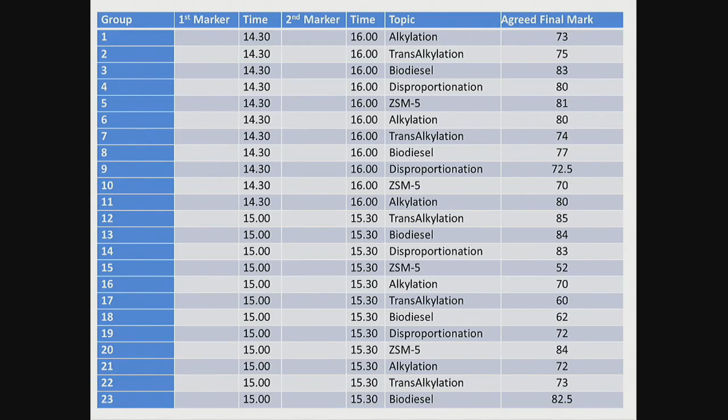All right everybody, let's get cracking. We've got to finish off the lecture, and then we've got an introduction to the next part. So we're on end of chapter 4, and away we go.

All I will say is congratulations, you beat last year's average mark for all parts of the coursework, just so you know. Well done to you lot. That's good, because last year they were good, but you were better. Maybe because some of you did the bio thing, I don't know. Maybe because the poster thing was relatively new for the bio and you had the opportunity, and it helped a little bit, I don't know, but you were better.

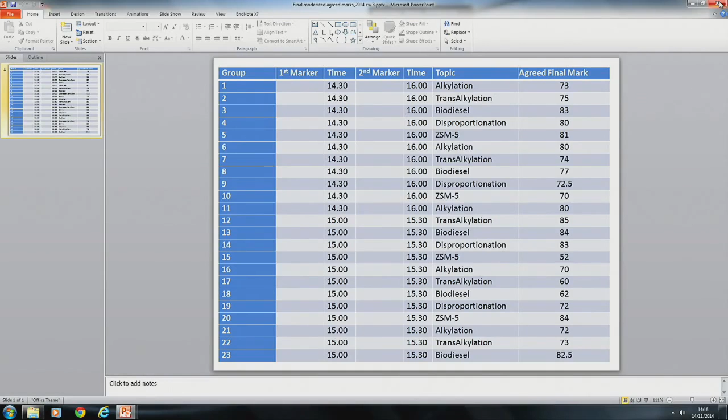The average on part 2 and part 3 was 5% better than last year. In fact, I was hoping to take some marks off you, but now I've actually given you extra marks, so good are you. Now then, I thought I'd opened these things up, but obviously I didn't.

Forgive me, just a little bit of fluffing around, apologies. Right.

So we talked about, and I'm flicking that up, to remind you what the ideal pore model was supposed to look like. It was a tube with a blocked end. An inkwell pore is what we refer to them as in the trade. That's your model.

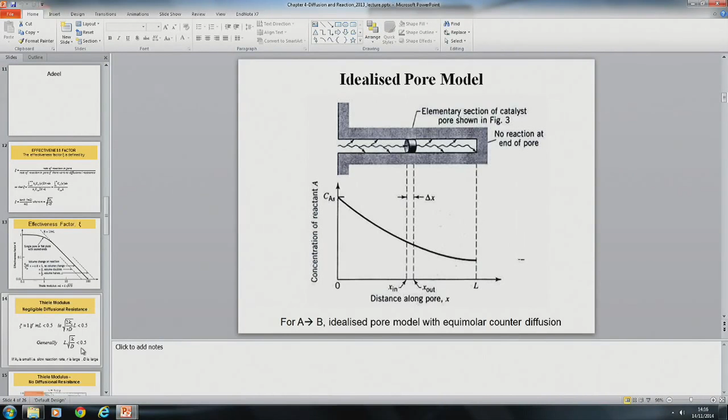What we did in class was we introduced the effectiveness, just so we know where we are. Effectiveness. And then finally we said, hold on a minute, pores aren't straight inkwells, they're actually ziggy-zaggy lines, and the effective diffusivity is actually different. That's where we stopped.

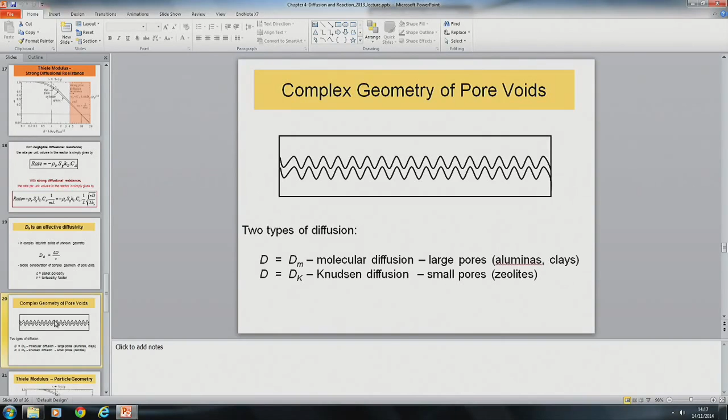Now in the notes, there's a little addition to what I seem to have not bothered putting on the slide, such a trivial thing. So the next slide goes on to explain what slab geometry is, which is that one.

I'm going to put that one up, but I'll allow you a minute to focus, because I know it's Friday afternoon. I want you to read the next bit of words underneath the ziggy-zaggy pore picture, just to introduce what we're about to quickly do 10 minutes on.

So now, ignoring the fact that it's a tortuous, variable shape, the length dimension can be taken as equal to A0. We're splitting the pore from the middle, so the pore in the middle is minus A that way and plus A that way. Then we take into account the surface area over the volume, and we've got an equation. That's the bit I want you to look at and take in.

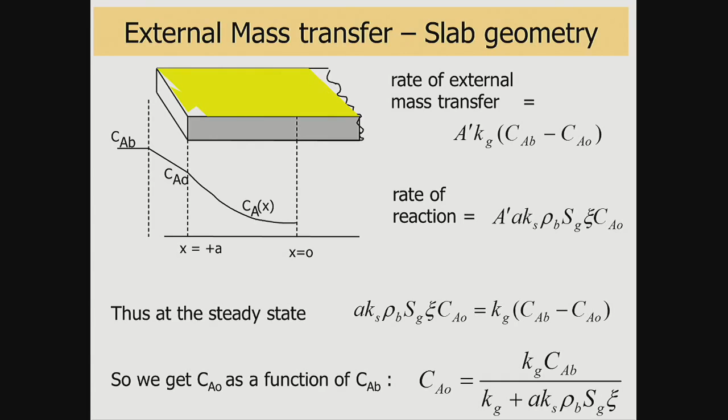That is pretty common in many of the textbooks, so you should just be able to pick up the textbook and understand what that means. If you're having trouble with it, worry not. I'll try and make it even more simpler.

Look at that top equation, which is the average rate. Remember CRE1, which is kinetic. Your rate on the first order equation is R equals KCA. That's exactly what that says, except we've now added in this mythical powdery stuff that is probably a pellet, or a wormy-like thing, or something like a cylinder.

So that then adds in additional terms. Now what we've done is we've got from the previous bit, which you've got in whole in your handbook, you've got the CA0. So if we substitute in for CA0, we end up with it in terms of what we want, the concentration in the bulk. So we measure what we put in, we measure what comes out, we've got our terms in our engineering way, and you're able to then manipulate the equations, and you end up with this additive surface reaction and mass transport, and that should look familiar.

And the reason it should look familiar is because you did it in the first week. It's right in the very first lecture in the introductory concepts, or the second lecture in introductory concepts, which says, what resistances do we have? We have the surface reaction, we have the diffusivity, and we have the attempt to get material across the boundary layer. Now, if you're still puzzled, because many people ask me, Dr. Garforth, Arthur, Dr. G, whatever, what's in the back of the handbook?

And what use is that to me? Well, in the back of the handbook is a little bit that explains that bit. Except it's in a classical textbook that's used by just about everybody who's anybody in industry. And it's by a chap called J. Richardson. And I photocopied the bit that explains that, and it's at the back of your handbook. So do take the trouble to look it up, because I can just say, this is this, you add this to this, and you get that.

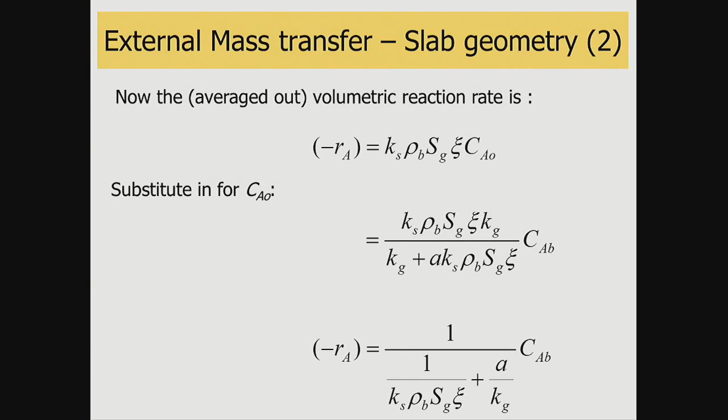That is why the external people tend to get 5% better than you. They've only got 1 course to study, now they've got 2 with Tom, so that'll slow them down a bit. So they've got 2 courses to do in industry, whereas you are in university doing 6 courses. So it's a bit easier for them than it is for you. But it's twice as difficult this year, I would say.

So what you've got now is you've got the overall effectiveness factor based on concentration in the bulk. And you can see the equation is there, and previously what you had is that. You can see that the overall finished equation looks like that. We've got some idea of length scale, but we've got bulk density, surface area, effectiveness in this term, which is the reaction term, and we've got the mass transfer constant here in the equation.

If we had a diffusivity effect, where is the diffusivity effect? Well, it's going to be somewhere in this one, isn't it? Because that's where the effectiveness comes in. So we've got mass transport, diffusion, and reaction rate.

Why am I stating that slowly? For the simple reason there are 3 parts to this course. The 4th part brings in energetics, and we'll talk about that, about reactions. And that's the bit how I determine whether you guys are operating in the wrong regime or I'm operating in the wrong regime, and we've got issues. And we've got that to come in a couple of, well, probably next week, actually.

So what's the important thing? The diffusivity is in there. What is the effectiveness? Normally, what are we targeting? So we're targeting it as a number. What do we want it to be? Do we want it to be 0? We want ml to be 0.5, not effectiveness. Effectiveness we need to be 1, but it never quite is. So ml, which is the Thiele modulus, equals 0.5.

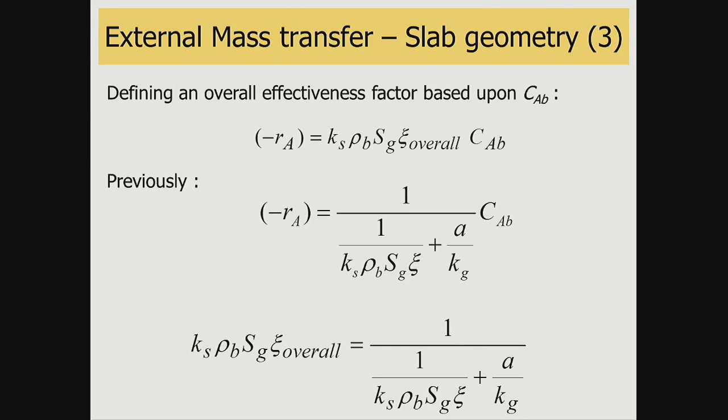We'll show you what happens in the next lecture. I was hoping to get to it today. I'll show you what happens in the next lecture when you don't actually make the hole on the reactor big enough. If you don't make the hole to get out of the reactor big enough, you kill people, and hopefully it's not yourself. Okay, so I'll show you that next time, and it will be linked to parametric sensitivity. You've done parametric sensitivity in second year, so it wouldn't hurt you to go back to CRE2 and have a look at temperature sensitivity around reactions, but we'll do that next time.

So just by summary, and hopefully it means something: in this way, the combination of the pellet effectiveness and the external mass transfer can be expressed in an overall effectiveness factor. So here's our two equations we just derived, very simple arithmetic equations, nothing to it, and we've got an overall effectiveness term over here. So what are we doing? We're taking this that we probably can't measure, or we can only get a handle on, and we're swapping it into that. So we're just literally making this a fixed fudge factor - a fiddle factor to allow us to better ascribe kinetics and modeling to our reactor system.

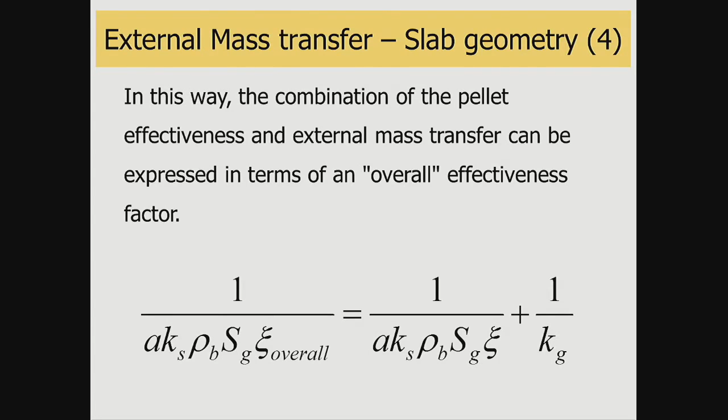Fingers crossed you remembered what I wanted you to remember. I've got the message of ml 0.5 and ml of 10 in there. I've got the message about what a pore looks like, so you can define the model and set it up. You can show me in a diagram what the model is, show me the inkwell, show me the zone moving through, and you could actually derive some of the equations. The concentration profile of the first order is what we've done.

The effectiveness factor and the Thiele modulus plot against one another, remember, looks like that. It's basically, for the bit we're really interested in, predominantly a straight line where the gradient is 1 over the Thiele modulus, 1 over ml. Apart from the very top of it, where ml is now going towards 0.5 and the catalyst is very effective and we don't have the problem.

So remember the axes, remember the curve, remember the curves which hopefully Tom left behind for me, which he did, bless his cotton socks, he's a lovely lad. So ml 0.5 and ml 10. This side of the class had the answer written when I was asking - it should have been a bit more speedy, but it's there.

So remember that. What does it mean? It talks about the effectiveness of getting your concentration into... go the other way around, go up. So the effectiveness is getting the concentration down the pore length. That's what effectiveness and Thiele modulus mean. Diffusivity and tortuosity mean - well, actually the path length is no longer straight, it's doing that. Therefore it's up to twice as long, therefore we're going to divide it by half, etc.

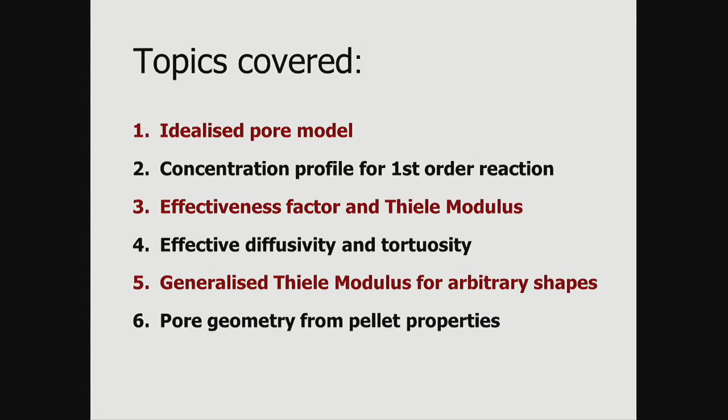And that endeth that. Now the next bit adds another complexity. We need a little bit of revision. Because it's Friday afternoon and I'm nice, we're going to do a little bit of revision, which may or may not be in the handbook. So what do we want to know now? We've got to the point where we've understood the setup of the reactor, we've understood the basic components, but now we want to do some fixed bed reactor calculations - the modeling bit.

I've blanked out one of the sections because it's in the notes and you can study it yourself. I want to look at the one-dimensional model, isothermal, and adiabatic. Remember isothermal is problematic because you have to hold temperature. Adiabatic is really quite nice in engineering terms because you just let it do what you want - very nice unless it runs away. By that I mean it doesn't get legs and run away, I mean it blows up. And parametric sensitivity is the bit that tells you about it blowing up.

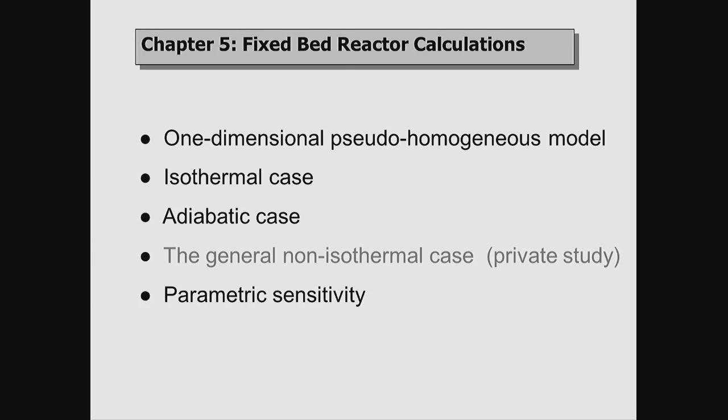Great exam question, lousy answers year in, year out. So this year I've given you an example of an explosion and a video clip we'll watch from somebody's home CCTV camera 5 miles away. It killed the engineer that designed the plant, it killed 4 process operators, and it only happened 3 years ago. I mean, no, it isn't in safety - so you haven't seen it before.

So let's just do a bit of revision, because the punchline, which is next Friday, is a nice little hook to catch you for next week. Okay, so plug flow reactor - let's remember what it looked like in CRE2. It's a straightforward curve.

We used to have the volumetric flow - the volume of the reactor over the flow rate at the start of the reaction, which is FA0, is a term, and we used to increase the conversion as you reduce the flow rate. Look at the data set - remember what I said about data and star maps. Yes, you can draw a curve through that, but you could also draw 2 straight lines through that, one of which seems to be very fast and the other seems to be very slow.

CRE3: integral reactor versus differential reactor. Differential reactor - very slow changes in concentration, very low conversions. Last week we talked about Langmuir-Hinshelwood, and we talked about an initial method on how we might distinguish reaction kinetics. One of the ways to do it was very low activity, very low conversion. So we imagine our equations now without the product in them - it simplifies all our Langmuir-Hinshelwood kinetics, our Eley-Rideal kinetics and all that. So if you look at the bit that's the straight line bit, that bit could be considered to be very low conversion.

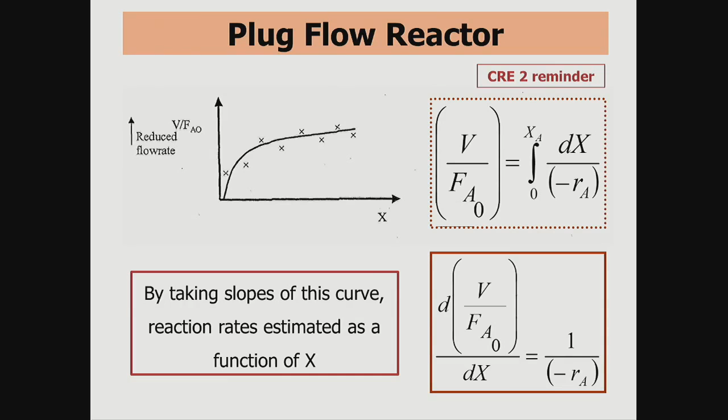Okay, so now we have 2 reactor designs. One with 1 kilo in it, and one with 100 kilos in it. And somewhere in between is going to be your design. That's how you approach a design project when you don't know what you're doing. Simple steps, bit by bit, knocking down what are, in effect, Aunt Sallys. This is my reactor. No, it's not. It's too big. That's what I should be having. And that's what I want you to be thinking about when you're doing the design project, not now, for next semester.

Okay, so does this make me any kind of expert? No. What it basically is, is just a reminder that here we've got an isothermal reactor. So we have a jacket. We've got a temperature of the jacket. This is all CRE2 basically. We've got an element which is moving between Z and Z plus dZ. We've got a flow rate which is a molar flow rate, and we've got a mass flow rate. We've got particles now in our tube which are the catalyst particles.

We should really say catalyst pellets or spheres or shapes. Those spheres are then interacted with by the feed. Obviously I've not filled the whole blessed thing. It's meant to symbolize the whole thing is full. Because we're talking about heat now, of course, we'll need to be talking about mean specific heat capacities. A thing that's an anathema to a chemist, because specific heat always changes. There is no such thing, but in engineering terms, it means you approximate between two numbers over the scale.

Is that a stretch, young man? It's all right, that's fine. Just checking.

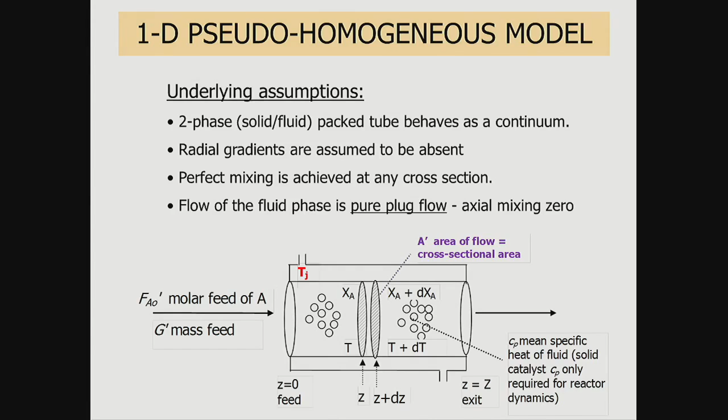So you've got the reaction rate. Remember now that our reaction rate, according to what we've been studying, has got this effectiveness factor in it. We've got the rate, which is dependent on the conversion and the temperature. That's obvious. It's determined with the conversion because of the reaction and the temperature because of Arrhenius. Is it exothermic or is it endothermic? So that's the energetics you're asking there. So that's a straightforward reminder.

You've got the A times the length, so you've got the cross-sectional area times the length is equal to the flow that you put through it times the conversion that's observed. You rearrange, you end up with the following equation, which you know because it's just the same. Except now you've done it by length, and you've got the conversion over the length for that element, and that gives you that equation there.

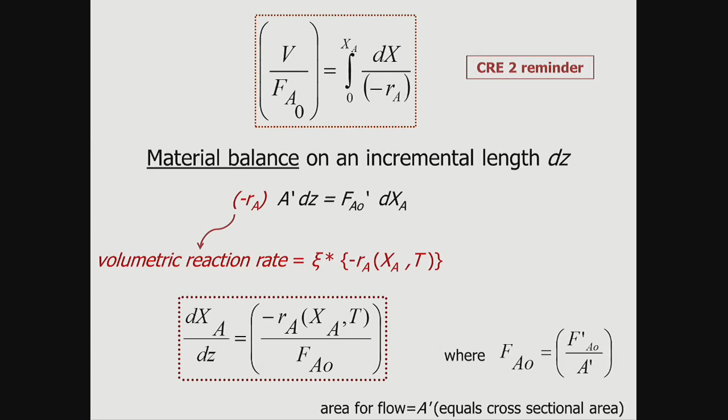I just want to check that that actually is in the textbook. It is. And I just want to check whether all that explanation is in the textbook. The only bit that's extra is the reminder.

Now, if you're to do a heat balance, you and I must know by now, because you've done enough of it, you're going to have UA delta T in there somewhere. You're going to have the mass flow rate times the CP, which is the heat capacity, and the change in temperature. And on the other side, you're going to have the flow rate and the conversion times delta H. That's your stuff from CRE2. Go back and have a look at it.

It's the first introductory lecture about Chapter 5, which is on heat integration in the reactors. The first 4 bits, which I think Aileen covers, is all about doing mass balances and about new reactor styles. The next bit, which Phil Martin covered, ends up being the heat integration bit. So if you want to go look back at CRE2, that's the bit that you need. The equation looks exactly the same as you've got there.

Key bits that you always mess up when you're doing this sort of thing is you mess up the delta T's, and you've got the temperature, and the temperature J is the temperature of the jacket, remember, from the diagram I just showed you, and it should all be on the page in front of you. Oh, did I say everything?

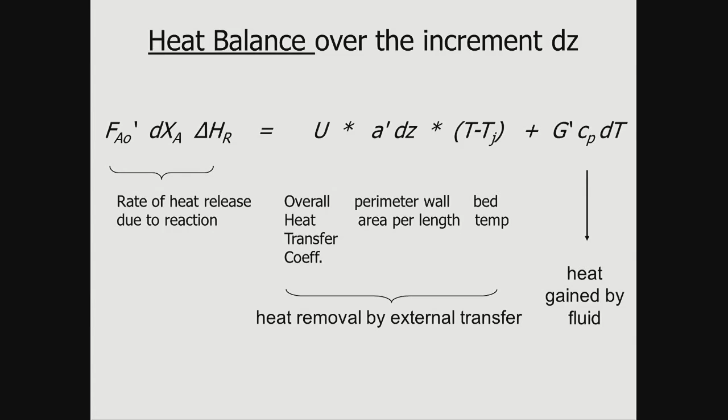Not quite. So just the last bit of reminder, you've got the heat from the reaction on the left-hand side is equal to the heat removal and the heat gained. The heat gained could be a heat lost as well, and you end up moving the equations around depending on what happens with your CPs, which you get from the literature, of course. Whether it's exothermic or endothermic, that's what matters. Okay, so we're doing the heat balance across this little incremental bit. That's all I want you to do.

And you end up with that equation, which is the change in temperature with the little increment that you're looking at is equal to the flow rate over the mass flow times delta H over the CP times the conversion over the length that you've looked at minus UA delta T over the mass flow and the CP. Now you can rearrange the equations yourself and have a play, and you can look at the notes as well, but there is no trick, there's no sleight of hand. It is straightforward algebraic manipulation.

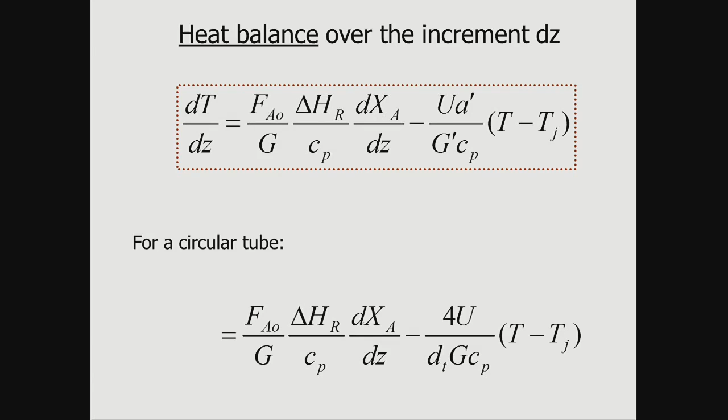So for a tube, you would get that equation there, and you would change it because you've got the diameter, and it ends up being 4U over d t G c p times delta T, which is the temperature minus the temperature of the jacket. So it's a cooling liquid minus the temperature of the jacket. So that's the overall equations, but that's not the bit that I really want you to focus on. The bits I want you to focus on are the 2 examples, isothermal and adiabatic.

And I think I'll just do one, because then we can stop and we can wander over, if I haven't killed you, and do some exam questions with my lovely demonstrators before we get onto parametric sensitivity, and I show you a little video next week.

So, isothermal's nice because the temperature doesn't change. So in other words, the temperature across this increment is no longer changing, therefore dT over dz equals 0. Therefore, you need only to solve the mass balance equation to figure out what's going on.

Okay, so let's just think about that in terms of something you've just read. So you've now got a set of data, conversion data, versus temperature or time on stream. You've looked at it, the people have measured it, they've given you the description, you automatically say, right, okay, they've tried to keep it isothermal, let's assume it is isothermal, they've got this rate. Big problem for you all. It's never isothermal. If it's endothermic, it's going to drop in temperature; if it's exothermic, it's going to gain temperature. They're going to spend their lives, so are you, trying to control that reaction to make it either not stop or not blow up.

But one thing's for sure, most chemists, me, until I came into chemical engineering, would never put a thermocouple in the middle of a reactor to tell the temperature. Most engineers still don't put thermocouples inside their reactors because it's too expensive and they never think to do it. And that's why Hickson and Welch blew up not long ago and other places blow up, because you don't put enough sensors in. You think you do. You think as new people, it's obvious they're bound to, but no they don't. Every time you put something in to measure something, you add complexity to a reactor system. Every time you add complexity, you add human error. You add cost and human error together, you have disaster.

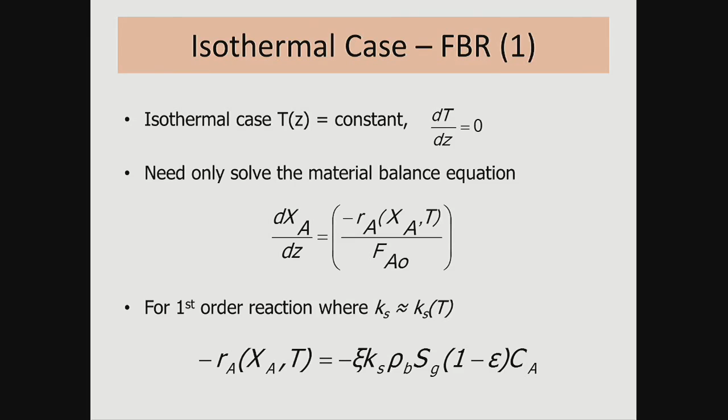So we need to solve for the mass balance, so that's the only equation you need to worry about. You've scrapped the other equation completely. No need to consider it. For a first order reaction, we've got effectiveness, reaction at the surface, bulk density, surface area, times 1 minus E, which is the tortuosity or the voidage. We'll figure that one out in a minute, times the concentration. And that's the bit I just want you to have a look at. You've most definitely seen this equation in CRE2.

Isothermal case, we've now rearranged it, so we're trying to get it in terms of conversion, because that's what we want to measure. We want to measure a conversion incrementally down a bed. Why? We've got x0, x equals 60%. That's what I will tell you in a publication, but I don't tell you how it changes down the bed. You want to model it, so you have to try and break it into a lot of CSTRs, lots of little reactors, so you can get an incremental change. Therefore, you want to work at the lowest conversion you can and break it into the simplest system that you can.

Okay, so look at the equations. They are just rearrangements and they are summations. So if you look at dxA over dz, you end up with that equation. Eventually, if you talk about integrating it, log 1 minus x should spring out of you as a straight first order integration of the rate equation, to give you log to the base e of 1 minus x. In other words, log 1 over 1 minus x should be there. And then you end up getting it in terms of conversion, which is 1 minus e to the k, which is the rate constant, times the incremental length.

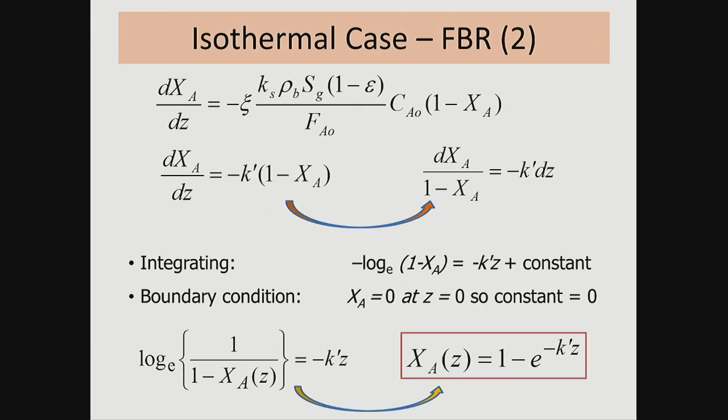There are people trying to get in, so we'll stop in a minute. I have done a model which I will work through and give you a free copy of, which will help you with design, which is an incremental integration down a bed, which does exactly this for a reaction. So I will give you that. It's part of the notes, but it's meaningless without the Excel spreadsheet. If you look at the Excel spreadsheet, you'll be able to work it out. And we may have time to play with that in one of our sessions next week, maybe in the slot before the tutorial, because it might be interesting.

I'm going to stop there because that's the final equation that you can see. And why is it turned into that? You've taken that and you've substituted it in and it looks like that. But it still looks like CRE2.